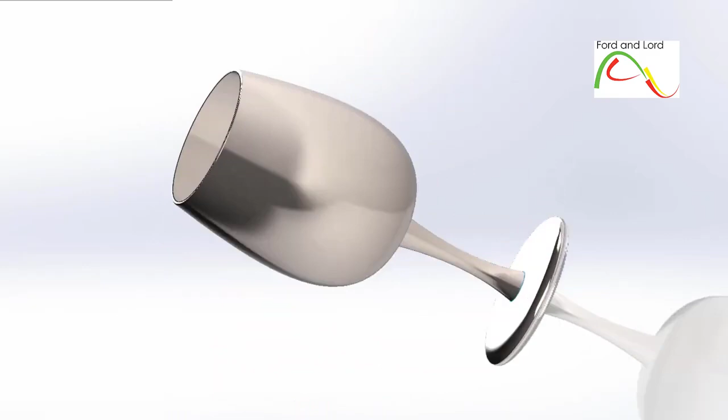Let's start. Go to File, New, Part, OK. Right mouse click on the right plane and select Sketch. Roll the middle mouse button down to zoom in a bit.

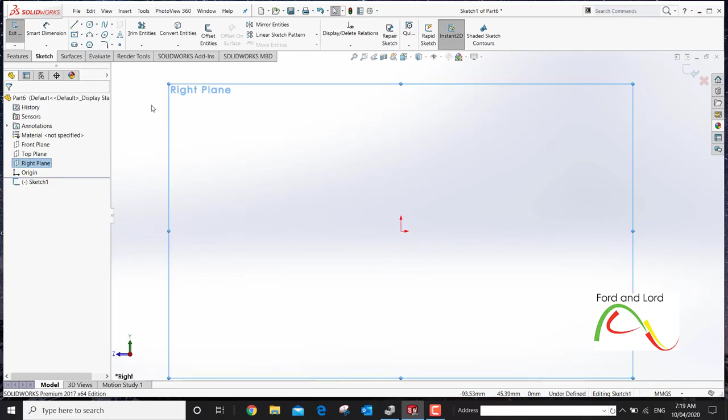Go to Line, click this arrow, and select Center Line. Create a vertical center line along the origin point. Left click, left click, left click, and left click. Right mouse click and select. We've just created 3 center lines.

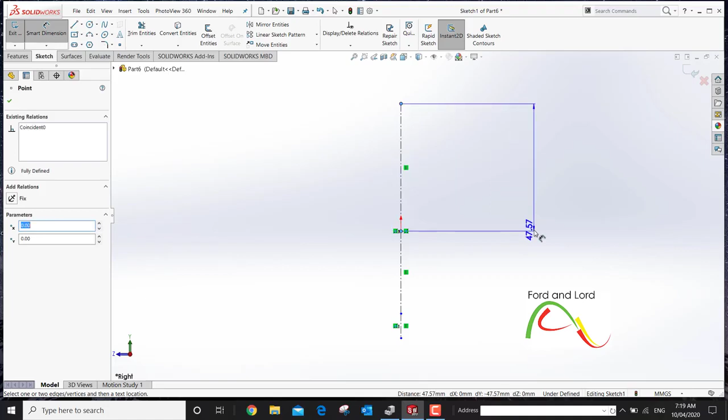Smart Dimension: the distance from here to here should be 60 millimeters, from this point to this point should be 40 millimeters, and from this point to this point should be 5 millimeters.

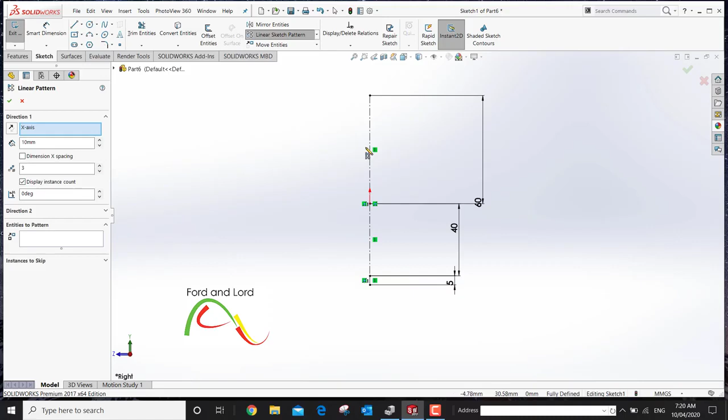Click OK, and we'll create 3 copies of these 3 lines. Go to Linear Sketch Pattern, select it, 3 copies, click on this line, press Ctrl and click on this line, and Ctrl click on this line. You can preview 3 copies, and we will change the distance to 25 millimeters.

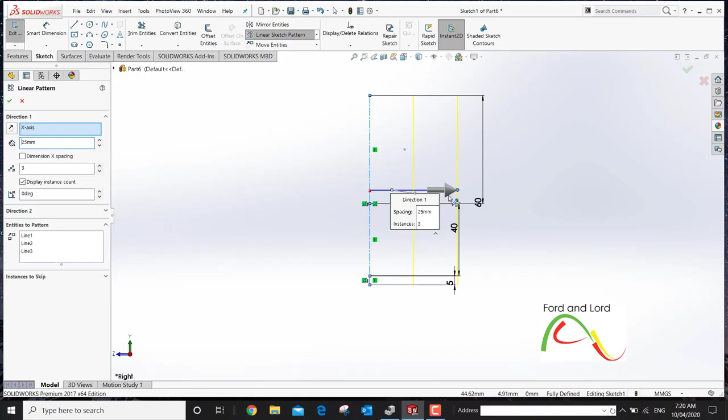We want to create the copies on the left side, not on the right side, so I will change the direction, and click OK.

SolidWorks will create some relationships automatically. Select and press the Delete button on your keyboard to delete them.

Select Smart Dimension. We know the distance from this line to this line is 25 millimeters. Click OK.

The distance from this line to this line should be 2.5 millimeters. Click OK.

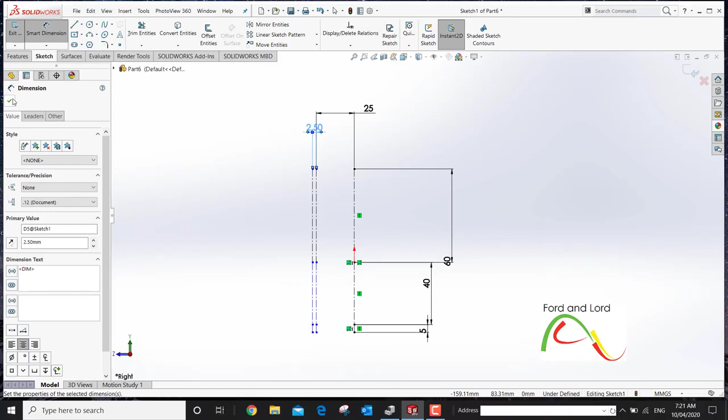Click the Spline Tool. Left click on this point, left click on this point. Right mouse click and select.

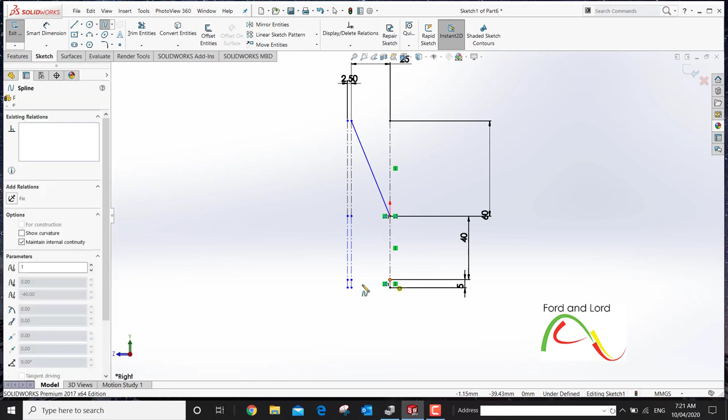Spline Tool again. Click on this point and click on this point. Right mouse click and select.

Select the Spline Tool one more time. Click here and click here. Right mouse click and select.

Now click this line. 2 handles will appear. All you have to do is drag this one out and down, and drag this one out and down horizontally.

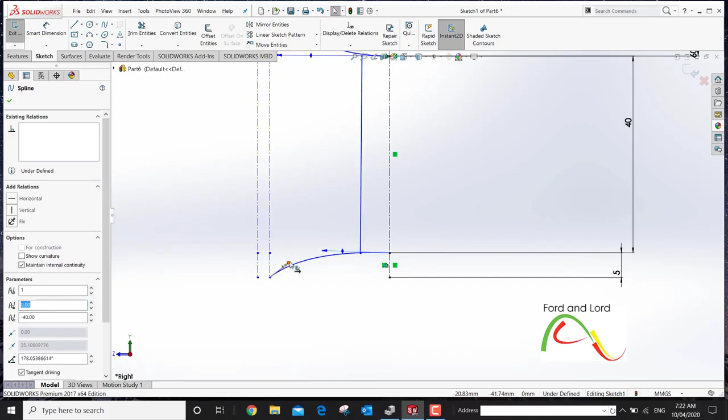And click on this line. 2 handles will appear again, and adjust them a little bit as I'm doing it.

Now left click on this line and press Ctrl and click on this point to make a coincident relationship. Now click on this point, press Ctrl and click on this line, and make it coincident.

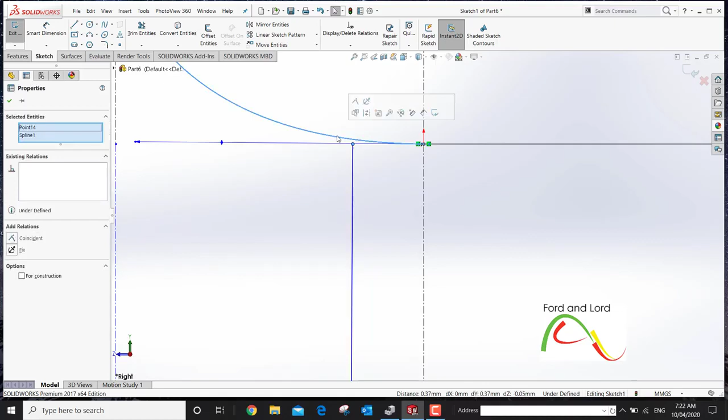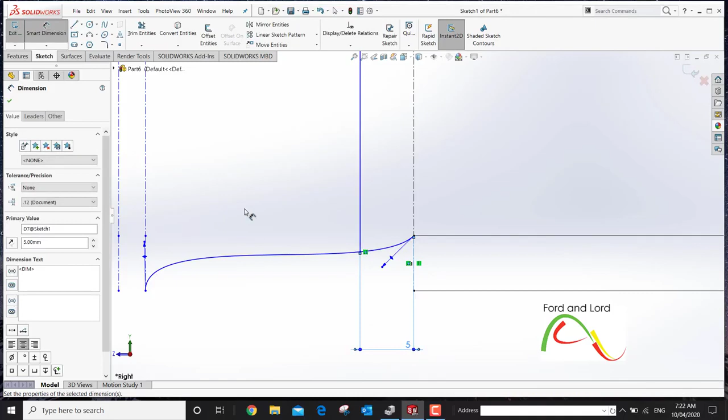Click Smart Dimension. Click on this point and this point; the distance between these 2 points should be 5 millimeters. Click on this point and this point; the distance should be 5 millimeters as well. Click OK.

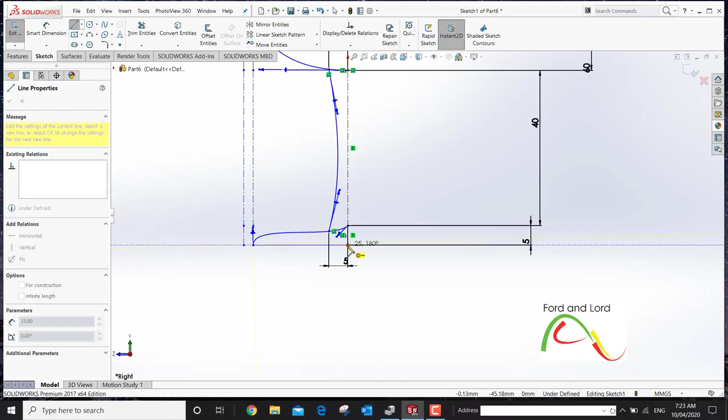Click on this line here and pull the handles in a little bit. Select the Line Tool and click here and click here. Right mouse click, select. Our sketch is now complete.

Exit out of it. This is Sketch 1. Make sure Sketch 1 is selected. Go to Surfaces, select Revolved Surface, click on this center line, and click OK.

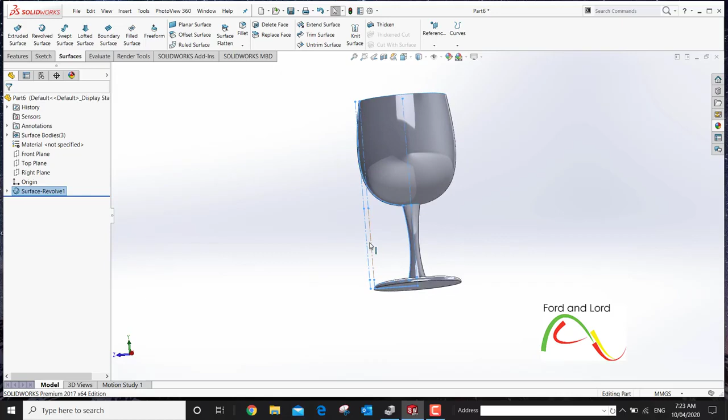And we have created a 3D model of the wine glass from the sketch. So, proportions could be a bit better. We can improve it a bit more.

Click Extend Surface and click on this edge. We are extending it by 10 millimeters. Click OK, and this is much better.

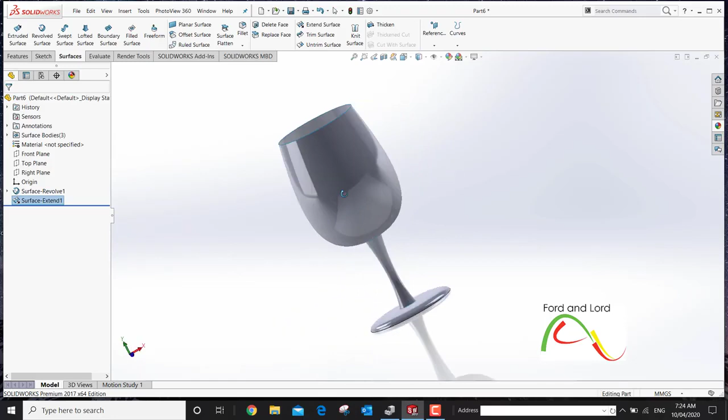We will also thicken it. Click this icon and click on this surface and change the thickness to 1 millimeter.

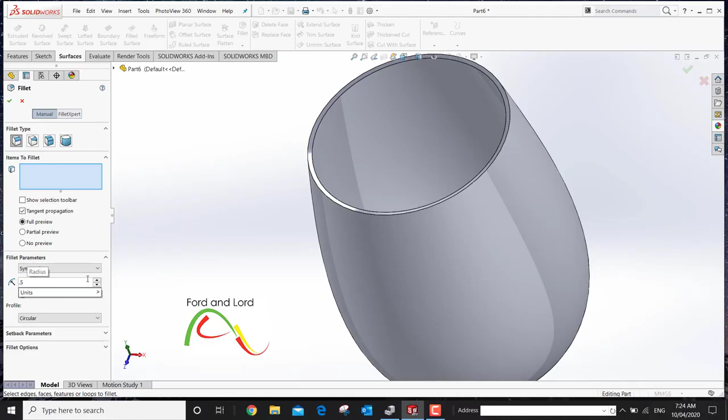Click OK, and we will apply fillet to these sharp edges. Click fillet, and 0.5 millimeters should be OK. Now click here and OK.

We'll also apply fillet on this edge here. Click fillet, select this edge, 0.5 millimeters, and OK. Our wine glass is complete.

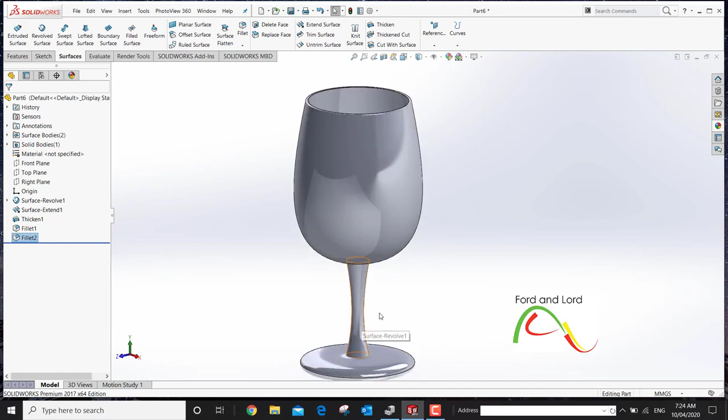We can apply material. I do not have a nice glass material rendered for the purpose of this video, so we can apply any other material, maybe steel, brushed steel—drag and drop, and you can see how beautiful and natural it looks. So this is how you create a wine glass in SolidWorks with minimum effort.